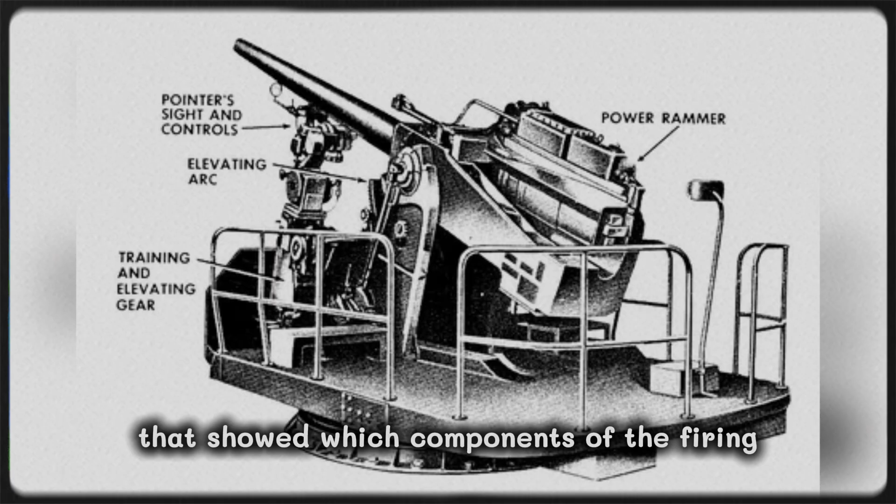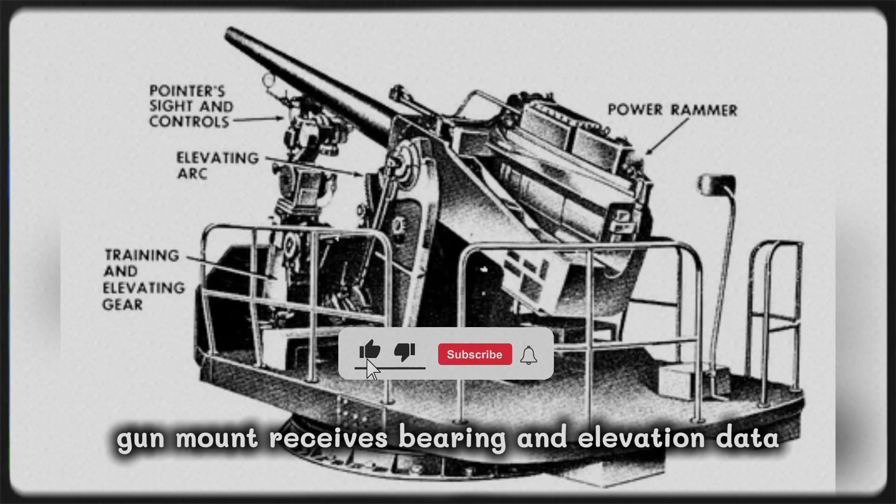The Zero was at 2,000 feet when Mount 51 fired again, and this time Chen wasn't watching the sky. He was watching the firing circuit junction box mounted on the bulkhead 3 feet from his head, watching the indicator lights that showed which components of the firing sequence were energizing. Fire control radar locks target, green light. Computer calculates firing solution, green light. Gun mount receives bearing and elevation data, green light. Shell loaded and fused, green light.

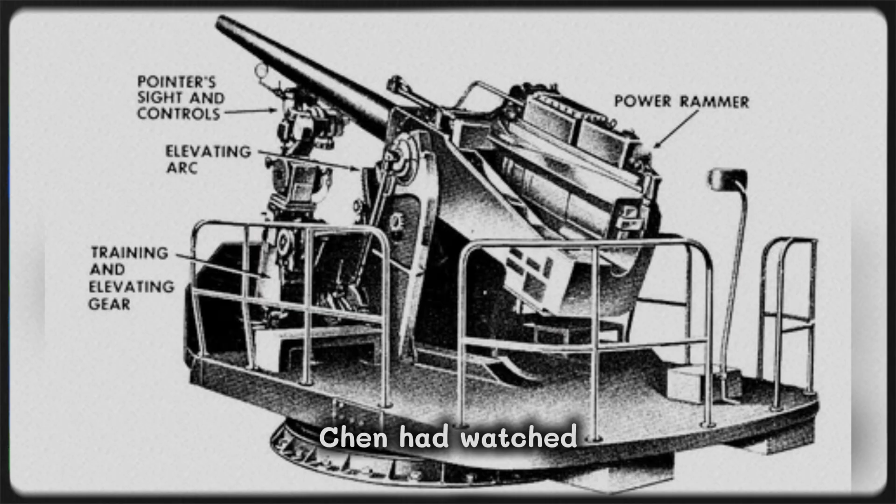Trigger pulled, red light indicating current flow to the primer, but there was something wrong with the timing. Chen had watched enough firing sequences in the past 3 weeks to develop an instinct for the rhythm, and the rhythm was off by maybe half a second. The fuse activation signal, which should have energized simultaneously with the primer, was lagging.

It was subtle, barely noticeable unless you were staring directly at the indicator panel during firing, but it was there. The fuse signal was arriving late, which meant the tiny radar transmitter inside the shell wasn't fully powered up when the shell left the barrel, which meant it needed extra time to reach operational capability during flight, which meant it might not detect the target until the shell had already passed the optimal detonation point.

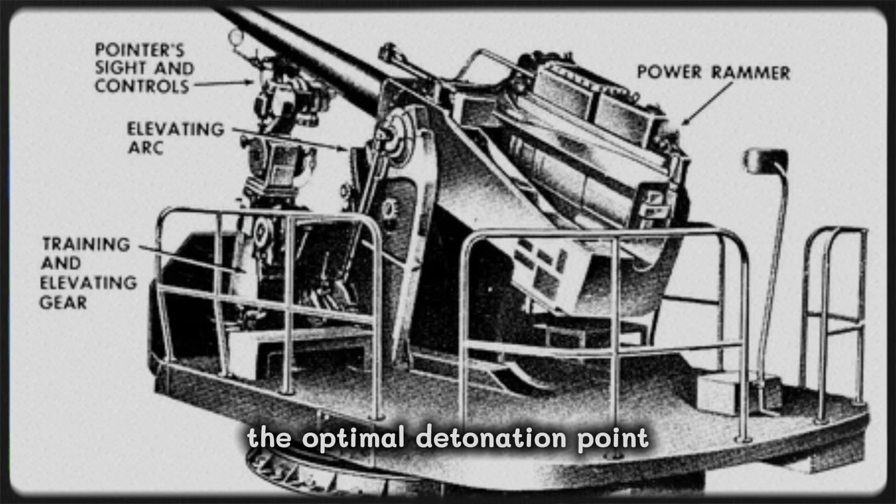Chen did the math in his head. A shell traveling at 2,600 feet per second with a half-second delay would be 1,300 feet past optimal detonation range before the fuse fully activated. Against a diving Kamikaze, 1,300 feet might mean the difference between a kill and a near miss that allowed the aircraft to crash into the ship.

The second round detonated at 1,800 feet, close enough that Chen felt the shockwave rattle the deck plating beneath his feet. But the Zero flew through the explosion barely damaged and kept diving. Mount 51 was traversing frantically, trying to track the rapidly descending aircraft, loading the third round. Chen grabbed the intercom handset mounted on the bulkhead and keyed the circuit to the Combat Information Center.

CIC, this is Chen on the forward gun deck. I think I know why the VT fuses are failing. Request permission to modify the firing circuit. The response came back immediately from Lieutenant Commander Burns, the ship's executive officer. Chen, we're under attack. Whatever you want to do, make it fast or don't do it at all. Chen didn't have time to explain.

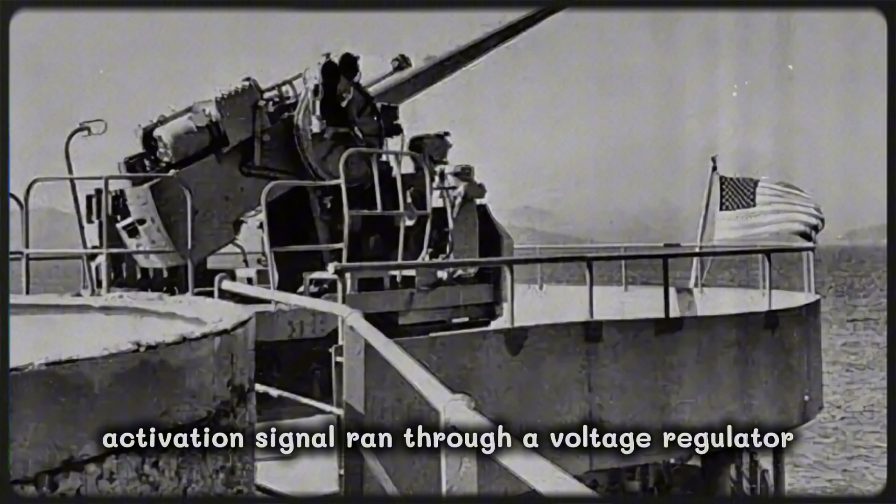He pulled his wire cutters from his tool belt and opened the junction box cover, exposing the tangle of colored wires that connected the fire control system to the gun mounts. The problem was obvious once you looked at it. The fuse activation signal ran through a voltage regulator designed to prevent power surges from damaging the sensitive electronics. But the regulator introduced resistance that slowed the signal by approximately 0.4 seconds.

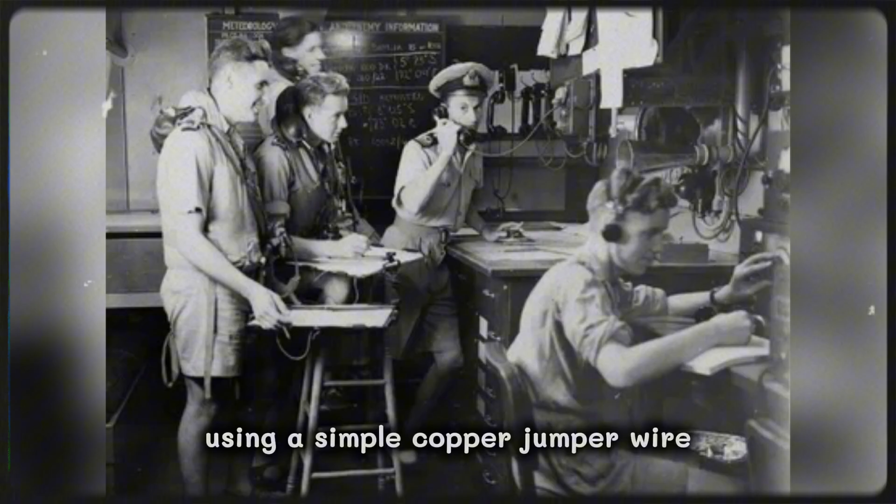The solution was equally obvious. Bypass the regulator entirely. Run the fuse activation signal directly from the fire control computer to the shell fusing mechanism using a simple copper jumper wire. It would eliminate the safety margin that prevented voltage spikes, but it would also eliminate the delay that was causing the fuses to activate late.

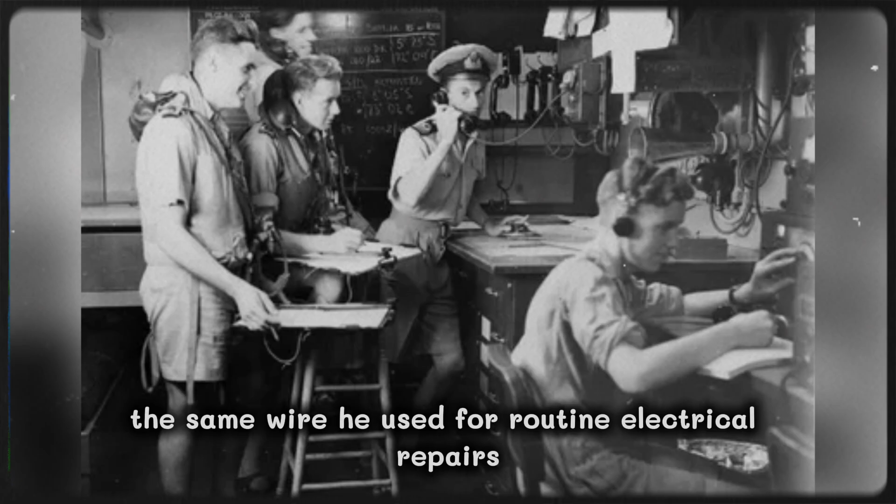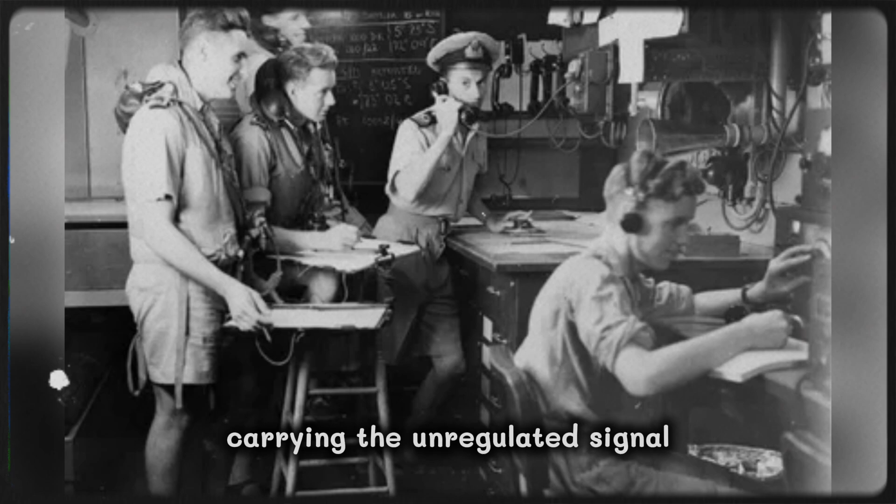Chen pulled a 12-inch length of 14-gauge copper wire from his pocket, the same wire he used for routine electrical repairs, worth maybe 35 cents at a hardware store. He stripped both ends with his wire cutters, exposing bright copper, and twisted one end around the terminal post carrying the unregulated signal from the fire control computer. The Zero was at 800 feet now, so close Chen could see the rivets on its wings, close enough to hear the howl of its engine even over the roar of the 5-inch gun firing its third round.

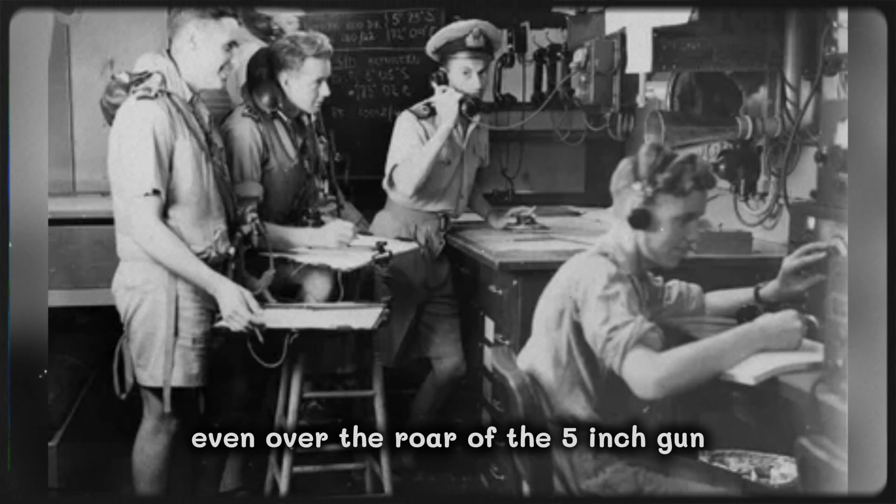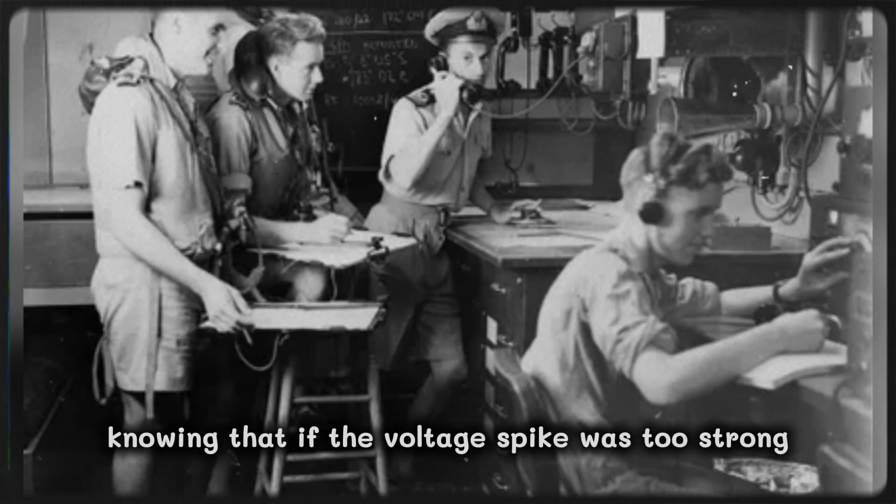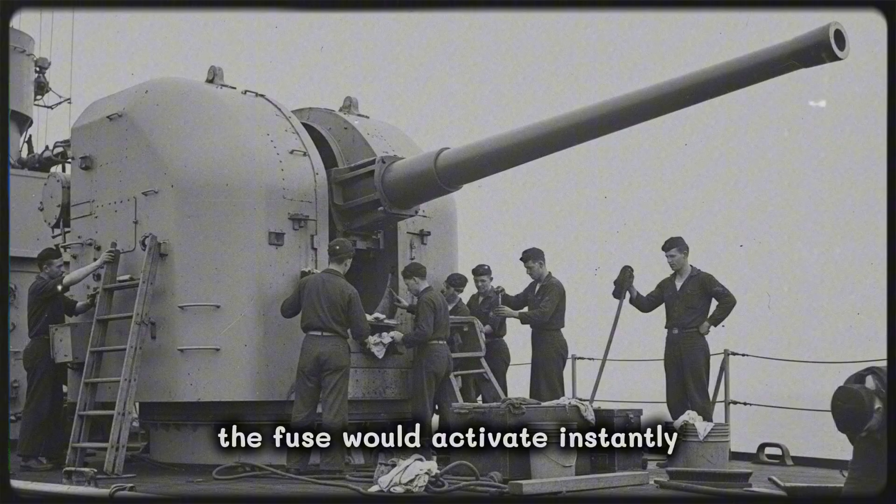Chen twisted the other end of the copper wire around the terminal post that fed directly to the shell fusing mechanism, creating a bypass that would send unregulated current straight from the computer to the fuse. He tightened the connections with his fingers, knowing that if the voltage spike was too strong, it might blow out the fuse's electronics entirely and turn the shell into an expensive dud. But if the voltage was acceptable, the fuse would activate instantly when the shell was loaded, giving it maximum time to power up before firing.

Chen slammed the junction box cover closed and keyed the intercom again. CIC, modification complete. Next round should fuse properly. Lieutenant Commander Burns' voice came back dry. Chen, if this works, you're getting a commendation. If it doesn't work, you're getting a court-martial.

Mount 51, commence firing. The fourth round left the barrel at 16:49 hours with the Zero at 400 feet, close enough that Chen could see the pilot's face through the canopy, see the white cloth headband wrapped around his helmet, see the expression of absolute determination that meant this man intended to die in the next 5 seconds and take the Laffey with him. The shell climbed, tracking the descending aircraft, and Chen watched the indicator panel showing fuse activation. Green light, instant, no delay.

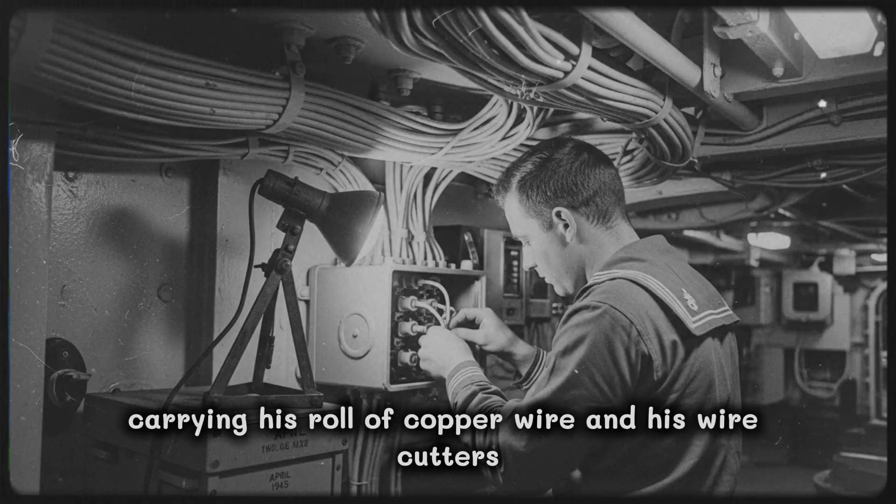The detonation came at 200 feet, a perfect airburst that turned the Zero into a cloud of shrapnel and burning fuel that rained down on the Laffey's forward deck without hitting anything critical. The pilot probably never knew what killed him. One second he was diving toward his target, the next second he was inside an expanding sphere of high-explosive shrapnel traveling at 8,000 feet per second. Mount 51's gun crew cheered, but Chen was already moving to the next gun mount, carrying his roll of copper wire and his wire cutters, ready to repeat the modification on Mount 52.

If it worked once, it would work on every gun on the ship. If it worked on the Laffey, it would work on every destroyer in the fleet. But at 16:53 hours, 6 minutes after Chen completed his first modification, the Laffey's radar detected 19 more kamikazes inbound from the northwest, part of the massive Kikusui No. 3 attack wave that would eventually throw 355 Japanese aircraft at the American fleet in a single afternoon.

The mathematics were simple and terrifying. 19 aircraft, 5 operational 5-inch gun mounts on the Laffey. Maybe 90 seconds before the kamikazes entered firing range, Chen had modified one gun. He needed to modify 4 more, and he needed to do it in 90 seconds or less, because if the unmodified guns kept missing their targets due to late fuse activation, the kamikazes would get through, and the Laffey would join the growing list of American destroyers sent to the bottom by suicide attacks.

Chen started running toward Mount 52 with his wire and cutters, his boots pounding on the steel deck, while behind him the sky filled with black dots that were growing larger by the second, and the IMC loudspeaker system blared the general quarters alarm for what felt like the 100th time that day. The crew of Mount 52 saw him coming, and one of them shouted, "What the hell are you doing, Chen?" Chen didn't answer, just grabbed the junction box cover and started working, his fingers moving with the speed that comes from absolute necessity when failure means death.

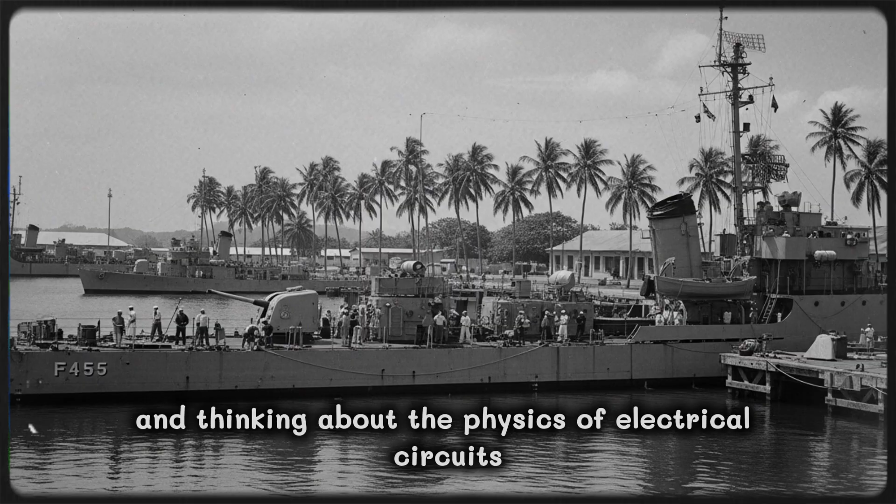But Bobby Chen wasn't thinking about casualty statistics at 18:14 hours when the last kamikaze attack wave finally withdrew. He was sitting on the deck next to Mount 51, with his back against the gun shield, his hands still shaking, his thumb wrapped in a dirty bandage, staring at the piece of copper wire still clutched in his left hand, and thinking about the physics of electrical circuits and the 0.4 second delay that had been killing American sailors since March.

The next morning, April 7th at 06:20 hours, Lieutenant Commander Burns summoned Chen to the captain's cabin. Chen expected praise, maybe the commendation Burns had mentioned over the intercom during the battle. Instead, he found himself facing Captain Frederick Becton, 3 other destroyer captains who'd been called over from nearby ships, and a stone-faced commander from the Fleet Technical Operations Group wearing the insignia of an electrical engineer. The commander's name was Patterson, and his first words were, "Electrician's Mate Chen, you modified Fleet Standard fire control equipment without authorization during combat operations. That modification violated 3 separate sections of Navy technical regulations. Explain yourself."

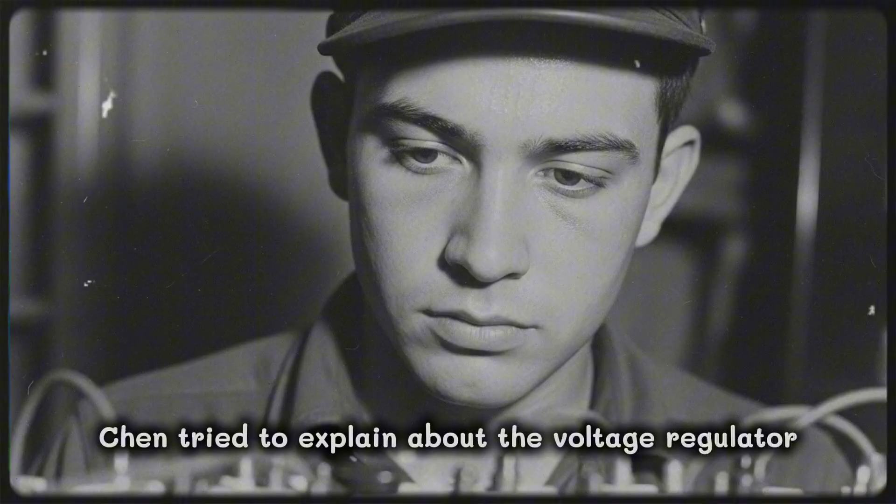Chen tried to explain about the voltage regulator, the timing delay, and the mathematics of shell flight and fuse activation, but Patterson interrupted him. 'Son, I helped design those circuits. The voltage regulator is there for a reason. You removed a critical safety feature. If you'd caused a power surge that damaged the fuse electronics, every shell fired from those guns would have been a dud. You could have gotten this entire crew killed.'

Captain Becton cleared his throat. 'Commander Patterson, with respect, Chen's modification didn't cause any duds. It caused 19 confirmed kamikaze kills in 79 minutes. I've been commanding destroyers in this fleet for 18 months, and I've never seen AA performance like that.'

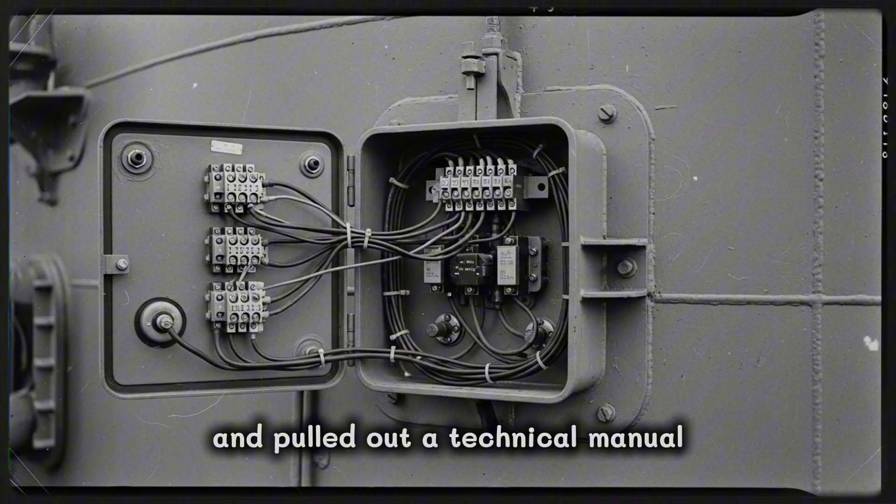Patterson stood up, walked to the cabin's small desk, and pulled out a technical manual thick enough to use as a weapon. 'Captain, these fuses represent 4 years of development work by 127 of the best electrical engineers in America. Are you telling me that an electrician's mate with no formal training found a design flaw that all of them missed?'

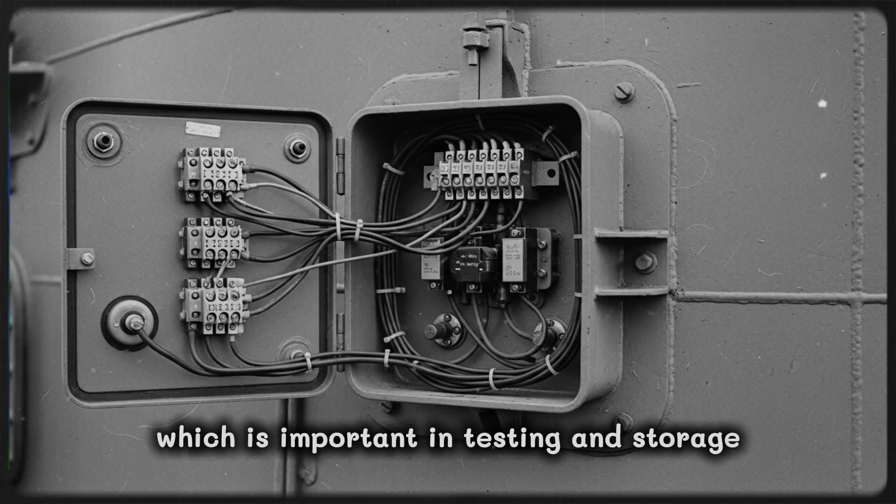Chen spoke quietly, almost apologetically. 'Sir, they didn't miss it. They made a trade-off. The voltage regulator protects the fuse electronics from damage, which is important in testing and storage. But in combat, when you're firing at diving aircraft, the 0.4-second delay means shells detonate after they've passed optimal range. The engineers who designed the system probably assumed the delay was negligible.'

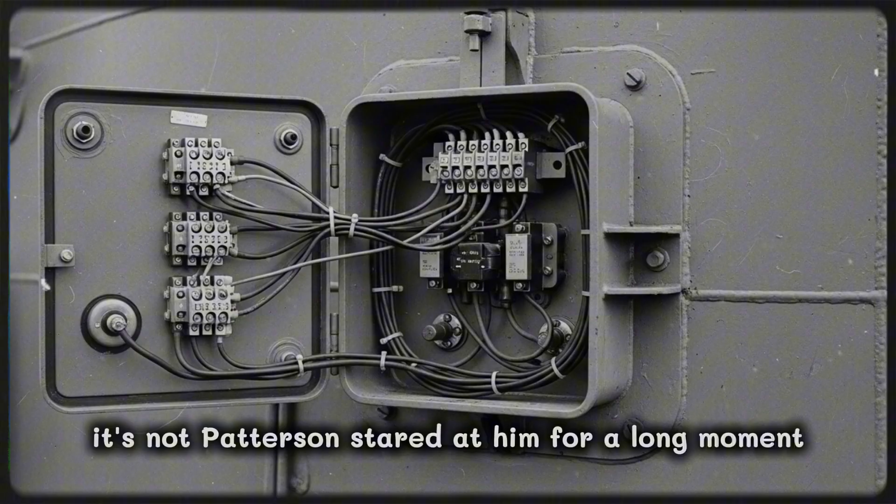'It's not.' Patterson stared at him for a long moment, then said something under his breath that might have been a curse or might have been grudging respect. 'Show me exactly what you did.'

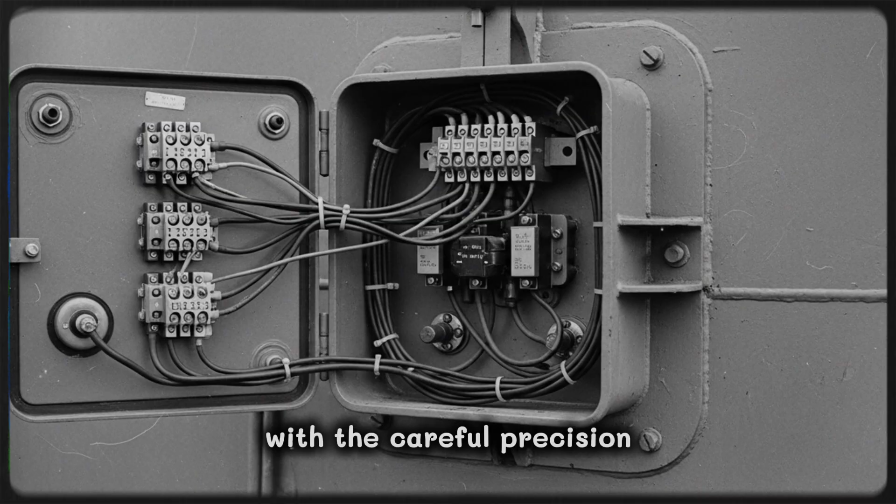They went to Mount 51 and Chen opened the junction box, pointing out the copper wire bypass while explaining the circuit topology in terms any electronics technician would understand. Patterson listened without interrupting, and when Chen finished, the commander pulled out a pocket notebook and sketched the modified circuit diagram with the careful precision of someone who'd spent years designing electrical systems.

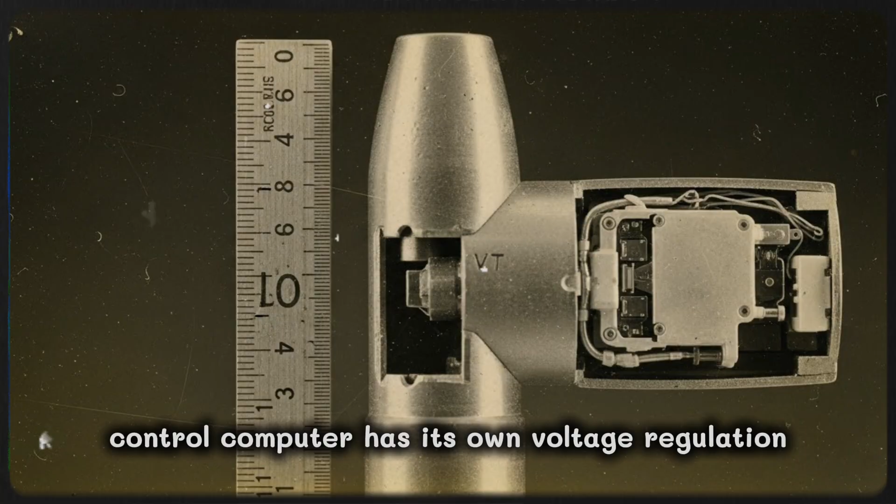'This shouldn't work,' Patterson said finally. 'The voltage spike should blow the fuse, but clearly it doesn't.' 'Why not?' Chen shrugged. 'Maybe the fuses are more robust than the specifications suggest. Or maybe the spike isn't as bad as predicted because the fire control computer has its own voltage regulation upstream. I don't know the theory, Commander. I just know it works.'

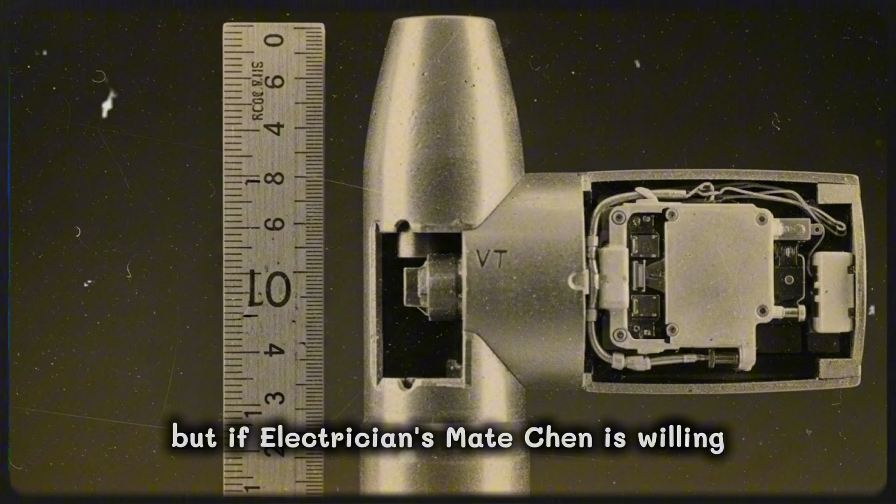Patterson closed his notebook and turned to Captain Becton. 'Captain, I need to test this modification under controlled conditions before I can recommend fleet-wide deployment. But if Electrician's Mate Chen is willing, I'd like him to install the bypass on 4 more destroyers and monitor performance over the next week. If the results match what we saw on the Laffey, I'll recommend immediate implementation across the entire Okinawa picket line.'

Becton nodded. 'Chen, you're temporarily assigned to Commander Patterson's technical group. Pack your gear. You're transferring to the USS Aaron Ward this afternoon.'

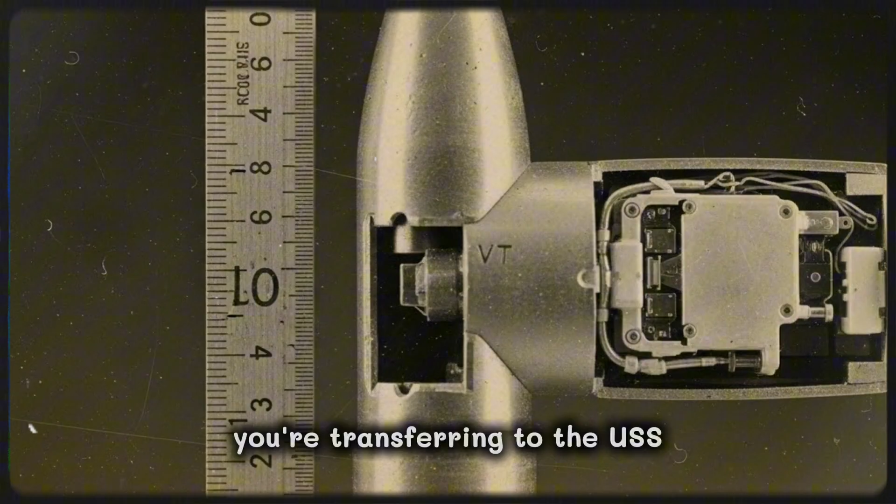Chen wanted to ask questions, wanted to know what fleet-wide deployment meant, wanted to understand why a simple wire bypass had suddenly become important enough to warrant attention from Fleet Engineering Command. But the expression on Commander Patterson's face suggested that questions would not be welcome. So Chen simply said, 'Yes, sir,' and left to pack his tool bag.

American destroyers were shooting down kamikazes with kill rates approaching 85%, far higher than anything observed in previous attacks. Ugaki couldn't know that the sudden improvement was due to a 23-year-old electrician's mate from San Francisco and a 35-cent piece of copper wire. He couldn't know that in the next 83 days, Bobby Chen's modification would be installed on 14 destroyers and shoot down 127 kamikazes that would otherwise have likely hit their targets. All Ugaki knew was that something had changed, that the Americans had found a way to make their already formidable technology even deadlier, and that the mathematics of the kamikaze campaign were starting to look increasingly hopeless.

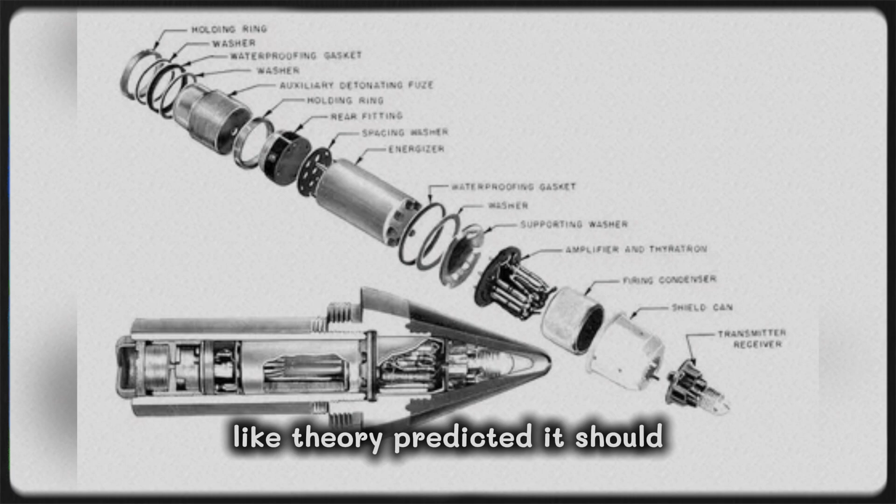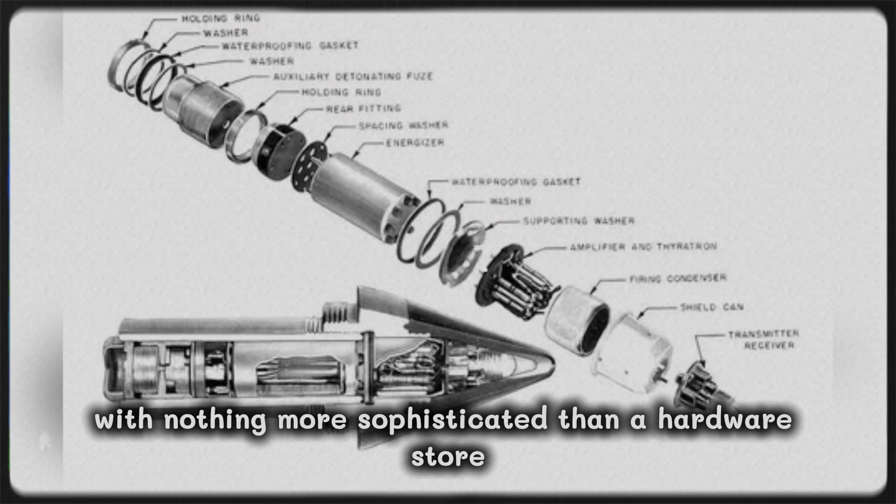Chen put the wire back in his tool bag and watched the Aaron Ward grow larger as the motor launch approached. He wondered how many more ships he'd modify, whether the bypass would keep working, or if some unforeseen problem would emerge. He wondered if Commander Patterson would figure out why the voltage spike didn't damage the fuses like theory predicted it should. But mostly, Bobby Chen wondered if anyone would believe him when he eventually told this story after the war—that he'd helped save thousands of American lives with nothing more sophisticated than a hardware store wire, a pair of cutters, and the willingness to ignore regulations when the situation demanded it.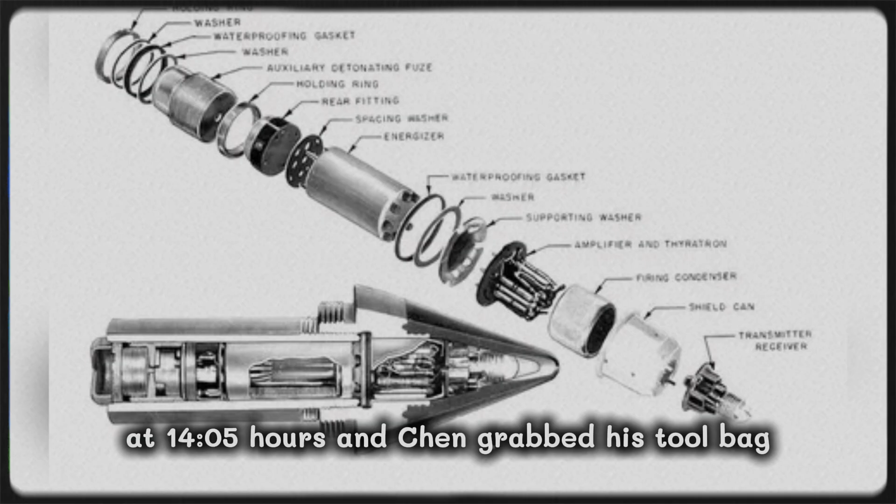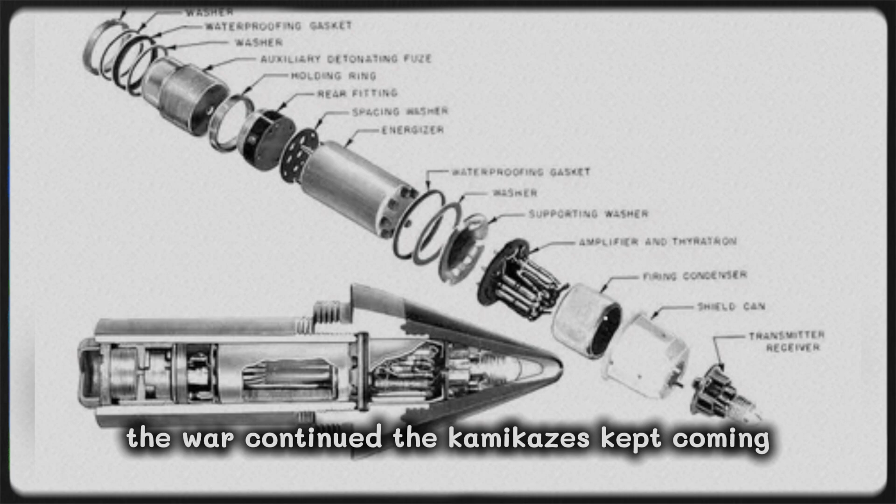The motor launch pulled alongside the Aaron Ward at 14:05 hours, and Chen grabbed his tool bag and climbed the ladder to the main deck, where an electrical officer was waiting to brief him on the ship's fire control systems. The war continued, the kamikazes kept coming, and somewhere in Bobby Chen's tool bag, a roll of copper wire waited.

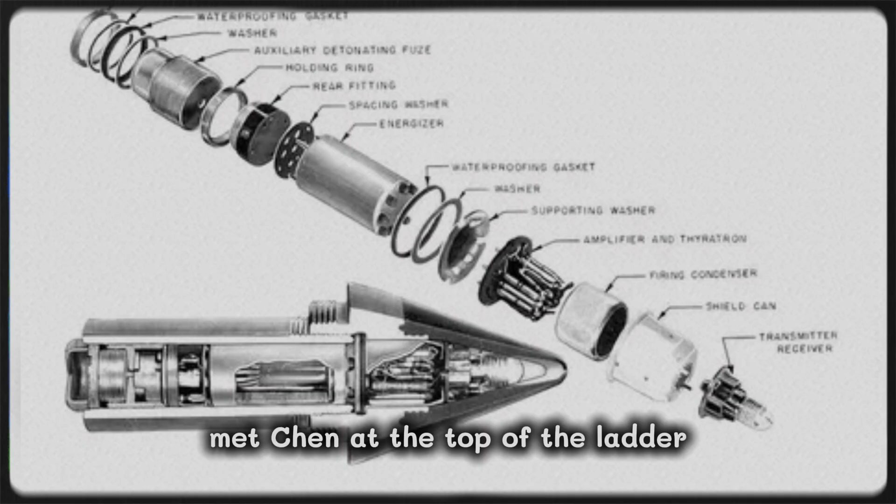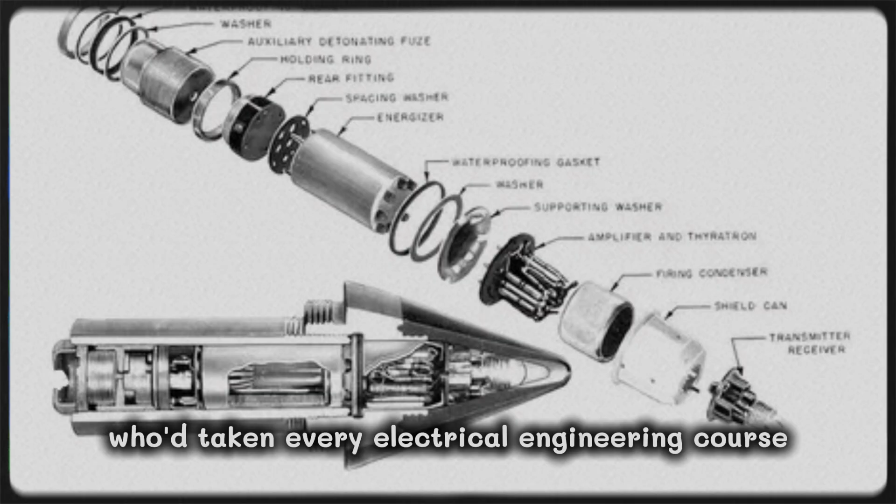The Aaron Ward's electrical officer, Lieutenant James Morrison, met Chen at the top of the ladder with an expression that mixed curiosity and barely concealed skepticism. Morrison was 27 years old, a 1941 Naval Academy graduate who'd taken every electrical engineering course Annapolis offered, and the idea that an enlisted man with no formal training had discovered a flaw in fire control circuits designed by the Navy's best engineers clearly bothered him on a fundamental level.

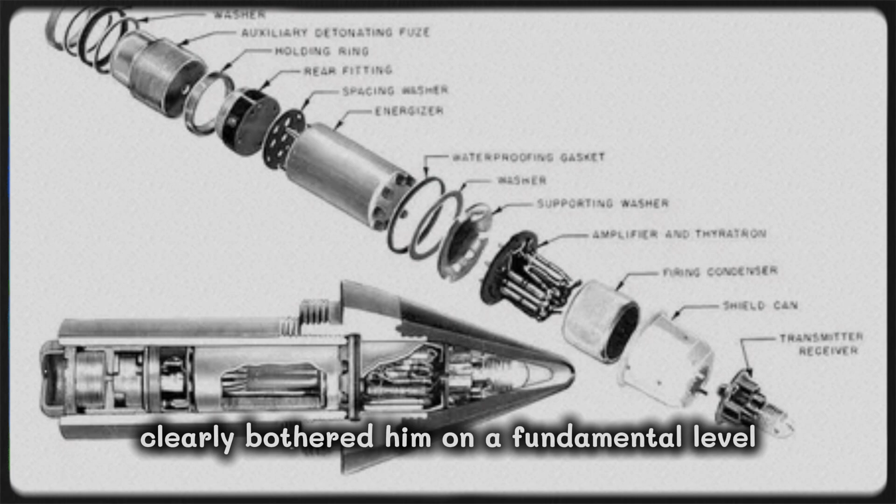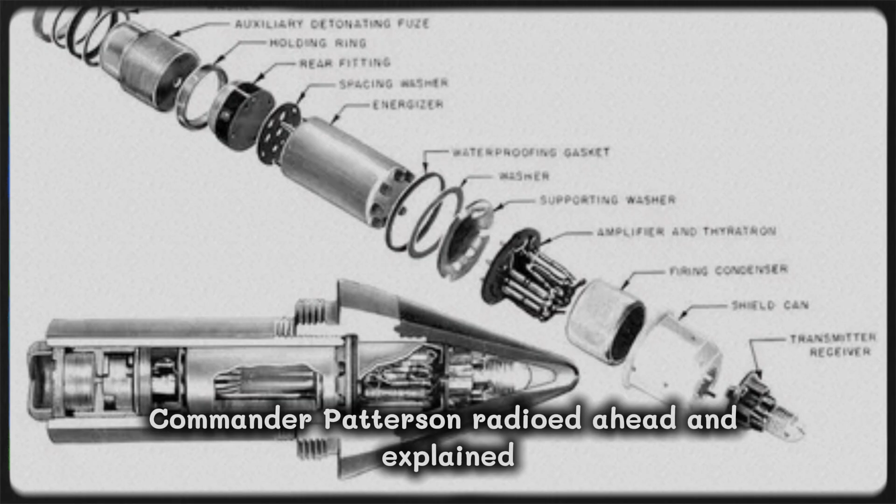Electrician's mate Chen, Morrison said, not quite managing to keep the doubt out of his voice. Commander Patterson radioed ahead and explained your modification. I've reviewed the technical specifications for the VT fuze firing circuits, and I don't see how bypassing the voltage regulator could improve performance without causing catastrophic damage to the fuze electronics. The regulator is there for a reason.

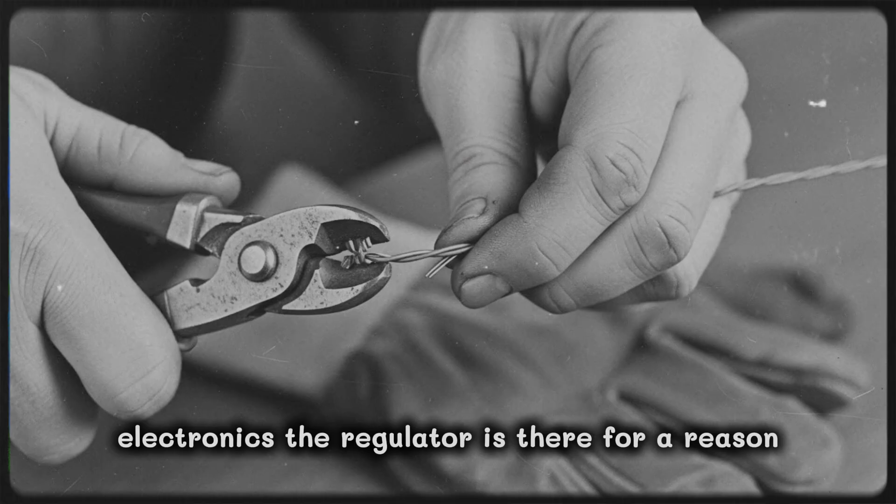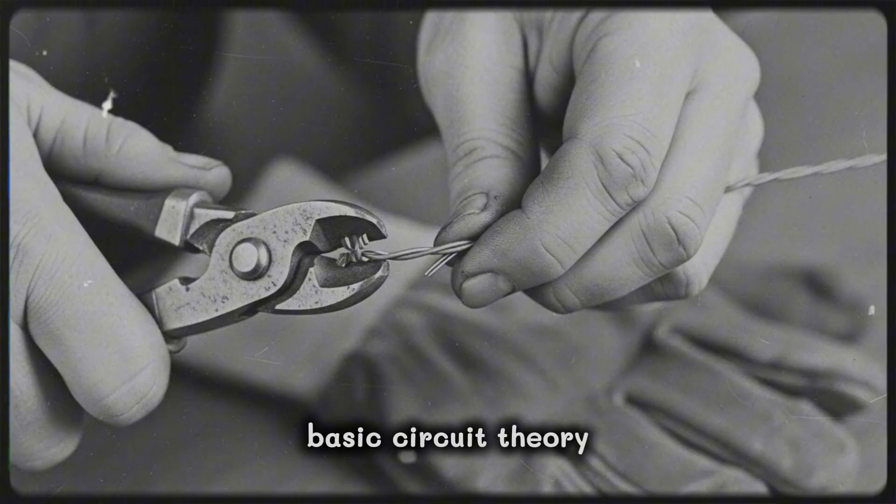Chen had heard this speech twice already in the past 4 hours, once from Patterson himself and once from the electrical officer on the motor launch. He was getting tired of explaining basic circuit theory to people with engineering degrees who somehow couldn't grasp that theory and practice sometimes diverged.

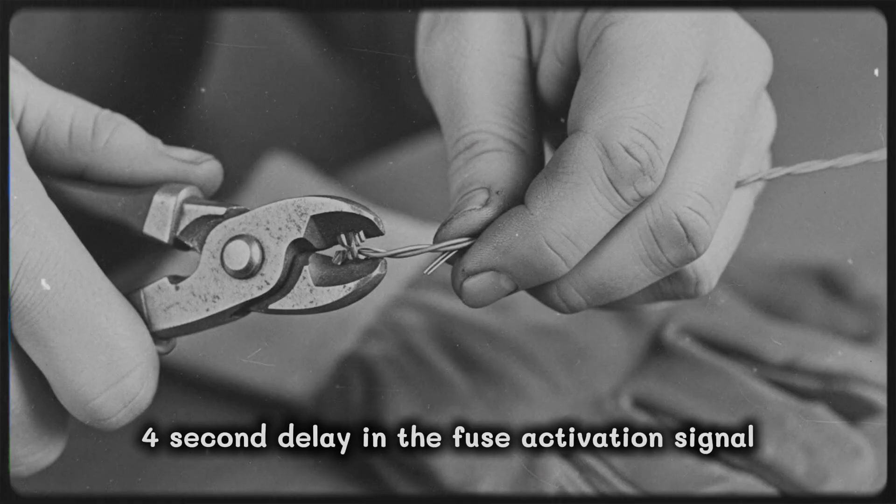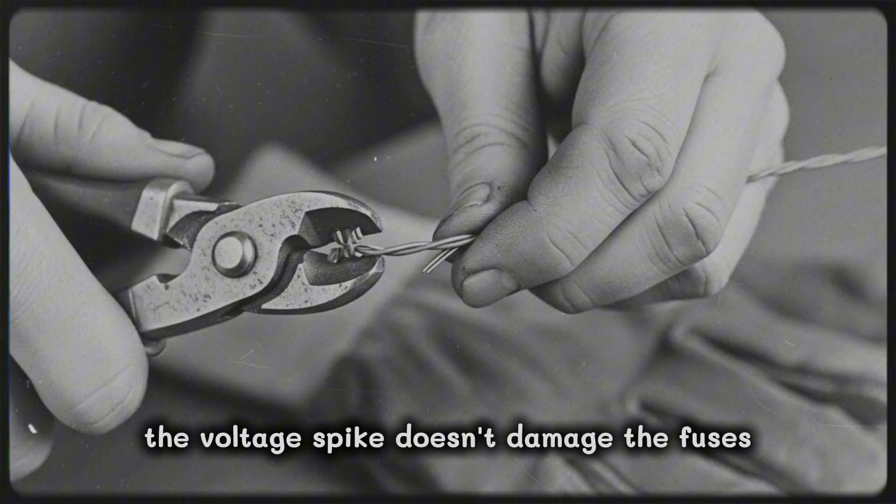Sir, with respect, the voltage regulator introduces a 0.4-second delay in the fuse activation signal. At shell velocities around 2,600 feet per second, that delay causes late detonation. The bypass eliminates the delay. The voltage spike doesn't damage the fuses because the fire control computer has upstream regulation that keeps the current within acceptable parameters. Morrison pulled out a pocket calculator and started punching numbers, his expression growing more troubled with each calculation.

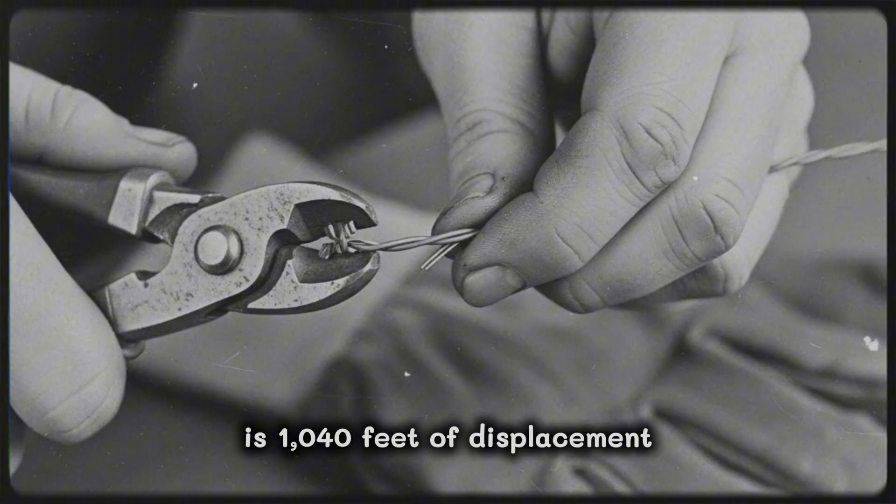0.4 seconds at 2,600 feet per second is 1,040 feet of displacement against a diving aircraft—that could mean... He stopped, looked up at Chen with something approaching respect. That could mean the difference between a kill and a near miss. Why didn't anyone catch this during testing?

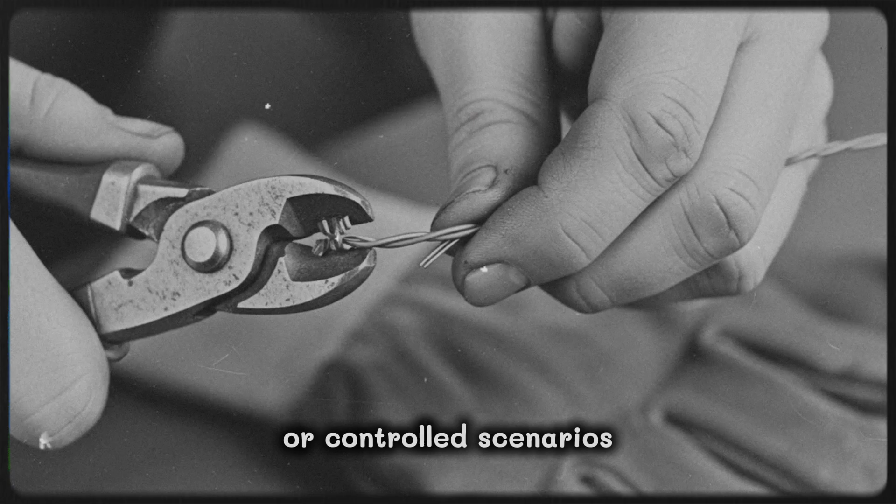Chen shrugged. Testing probably used static targets or controlled scenarios where the timing didn't matter as much. Real combat against diving kamikazes exposes problems that bench testing misses. Morrison closed his calculator and pointed toward the aft superstructure. Mount 51 is this way. Show me exactly what you did on the Laffey.

They walked through the Aaron Ward's narrow passages, past sailors who were preparing for the evening watch change, past damage control stations stocked with firefighting equipment and medical supplies, past bulkheads still showing scorch marks from a near miss during the previous day's kamikaze attacks. The ship smelled of oil and paint and the peculiar metallic tang that Chen had learned to associate with combat-damaged vessels trying to make repairs while still on station.

Mount 51 on the Aaron Ward was identical to the one on the Laffey, a standard Mark 38 5-inch gun mount with associated fire control equipment. Chen opened the junction box and showed Morrison the existing circuit configuration, tracing the path of the fuse activation signal through the voltage regulator. Here's where the delay happens, Chen explained, pointing to the regulator component.

The signal comes from the fire control computer, passes through this regulator which drops the voltage and slows the rise time, then continues to the shell fusing mechanism. By the time the fuse receives full activation current, the gun has already fired and the shell is several hundred feet downrange.

Morrison examined the circuit carefully, comparing it to a technical diagram he'd pulled from his clipboard. "And your modification bypasses this component entirely." Chen nodded and pulled out his roll of copper wire. "I run a direct connection from the computer output to the fusing mechanism. The voltage spike is higher, but it's still within the fuse's design tolerance."

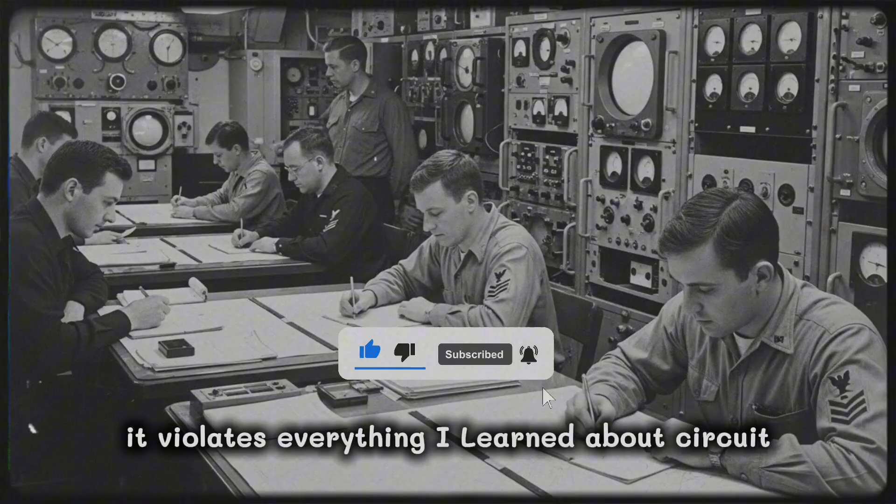"The fuse activates instantly instead of lagging by 0.4 seconds." Morrison watched as Chen stripped both ends of a 12-inch wire section and positioned it for installation. "If this works, it violates everything I learned about circuit protection at the Academy. If it doesn't work, we're going to have a very uncomfortable conversation with Commander Patterson."

Chen twisted the first connection tight, then paused and looked at Morrison. "Sir, I saw it work yesterday. Mount 51 on the Laffey shot down 4 kamikazes in 5 minutes after the modification. Before that, we were missing targets by hundreds of feet. The physics are simple. Eliminate the delay, improve the hit rate. Everything else is just details."

He completed the second connection and closed the junction box. "Modification complete. Next time Mount 51 fires a VT-fused round, the fuse will activate instantly." Morrison made a note on his clipboard, then looked at his watch. "It's 14:45 hours now. We're on radar picket station until 2100 hours. Intelligence expects another kamikaze wave sometime this evening. I guess we'll find out if your theory holds up."

They walked back to the Combat Information Center where the Aaron Ward's captain, Commander William Sanders, was studying radar plots showing the positions of other picket ships. Sanders was 38 years old, a career destroyer officer who'd commanded the Aaron Ward since her commissioning in March 1944, and he'd survived enough combat to know that unconventional solutions sometimes worked better than approved doctrine.

"Lieutenant Morrison tells me you've completed the modification on Mount 51," Sanders said without looking up from the radar display. "How confident are you that this won't cause problems?" Chen chose his words carefully. "Captain, I'm confident the modification improves fuse performance. I can't guarantee there won't be unforeseen issues, but based on yesterday's combat data from the Laffey, the risk-reward ratio favors the bypass."

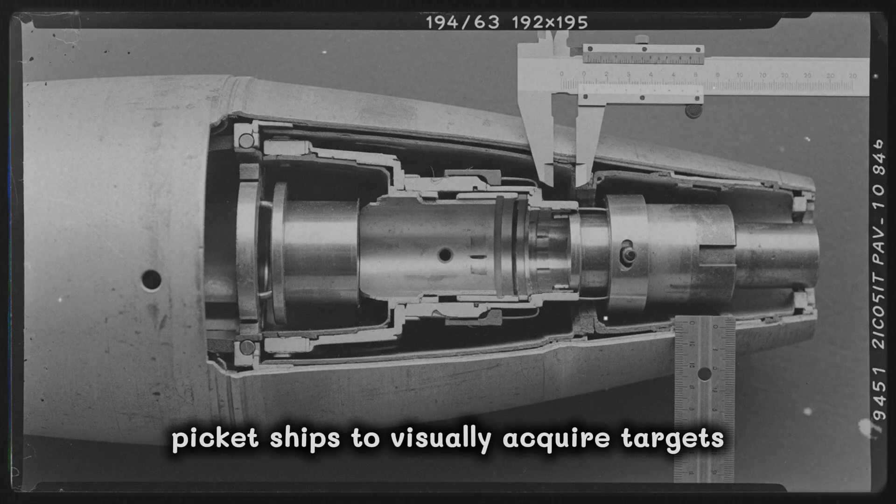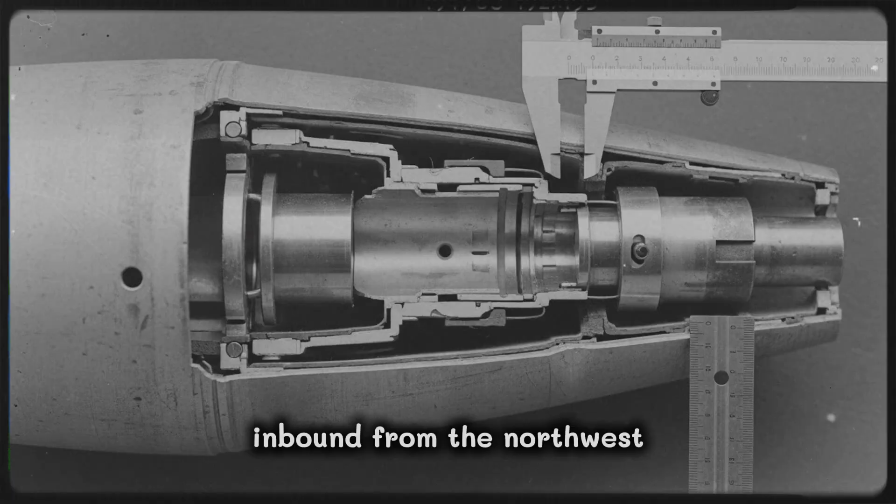The kamikazes arrived at 17:43 hours, right on schedule according to the pattern that American intelligence had observed over the past week. Japanese commanders were launching attacks in late afternoon when the sun angle made it harder for radar picket ships to visually acquire targets, and when American fighter cover was transitioning between day and night cap rotations. The Aaron Ward's radar detected 11 aircraft inbound from the northwest at 18,000 feet, descending rapidly in the attack profile that meant kamikazes rather than conventional bombers.

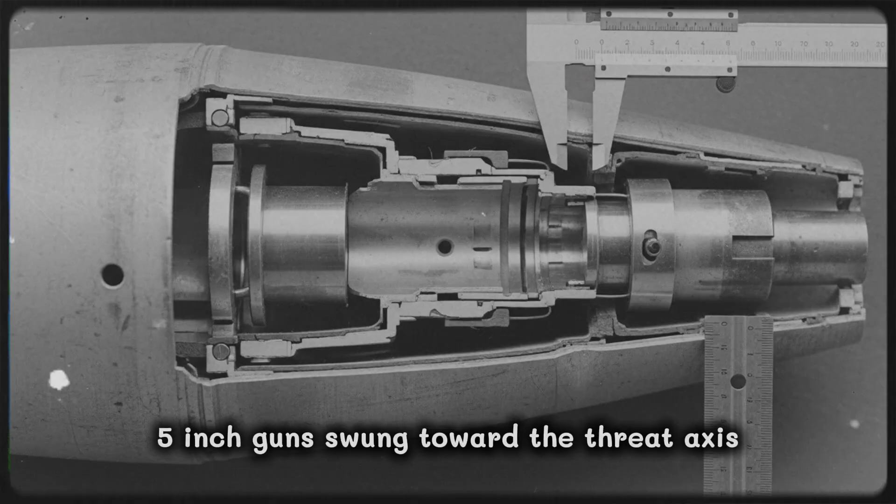Sanders ordered general quarters, and the ship's five 5-inch guns swung toward the threat axis, tracking targets that were still too far away to engage, but closing fast. Chen stood on the forward gun deck next to Mount 51, watching the same indicator panel he'd monitored during yesterday's battle on the Laffey.

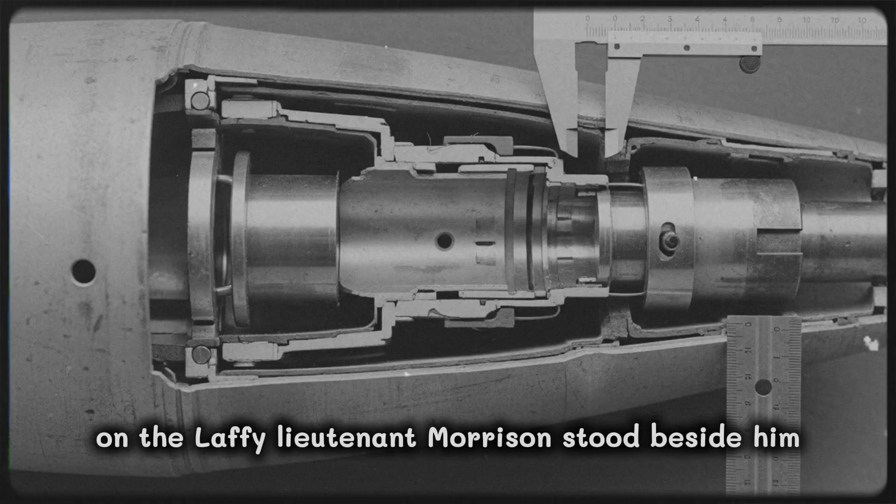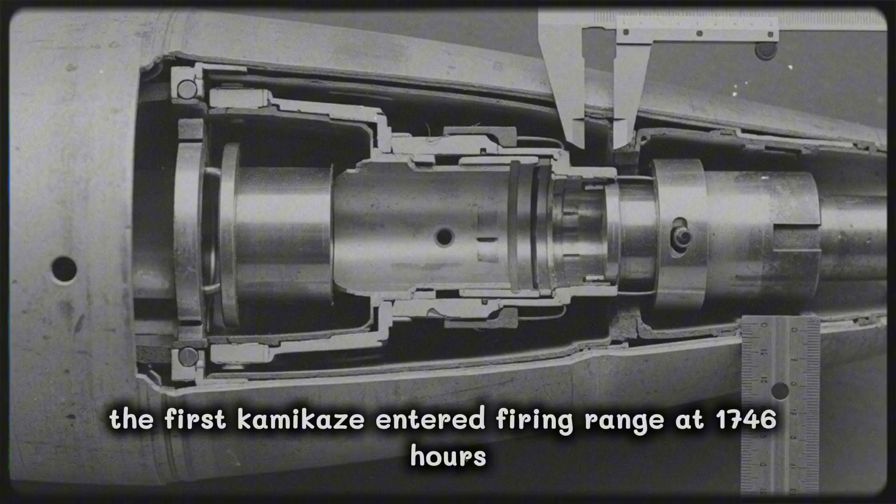Lieutenant Morrison stood beside him with a stopwatch and a notepad, ready to record exact timing data for each shot. The first Kamikaze entered firing range at 17:46 hours, diving out of the sun at approximately 400 knots.

Mount 51 with Chen's modification fired first. The shell climbed, the fuse activated instantly as indicated by the green light on the panel, and the airburst detonated at 5,800 feet. The Kamikaze disintegrated, its engine separating from the fuselage and tumbling into the ocean trailing black smoke. Morrison clicked his stopwatch and made a note.

Fuse activation, instantaneous. Detonation altitude, optimal. Target destroyed. Mount 52, also modified, fired at the second Kamikaze and achieved identical results: instant fuse activation, perfect altitude detonation, confirmed kill. But Mount 54, with standard unmodified circuits, fired at the third Kamikaze, and the result was dramatically different.

The shell detonated late, at approximately 4,200 feet, well past the optimal burst point. The Kamikaze flew through the explosion with visible damage, but remained airborne and continued diving toward the Aaron Ward. Morrison's stopwatch confirmed what Chen already knew: the unmodified gun's fuse had activated 0.38 seconds after the shell was fired, close enough to Chen's predicted 0.4-second delay to validate his analysis. The Kamikaze that had survived Mount 54's shot was now at 2,000 feet and accelerating.

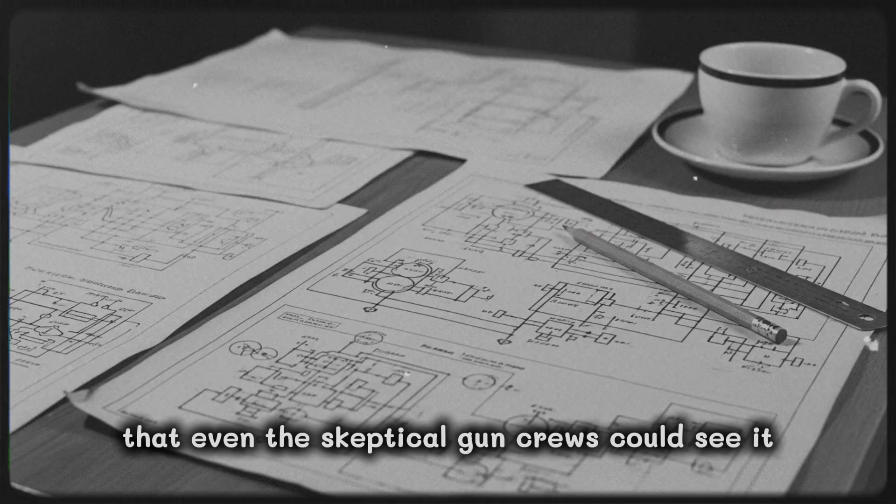Over the next 23 minutes, the Aaron Ward's gun crews fired 47 rounds at 11 attacking Kamikazes. The three guns with Chen's modification achieved 18 confirmed kills, with perfect fuse timing on every shot. The two guns with standard circuits achieved only 4 confirmed kills, with multiple late detonations that allowed damaged Kamikazes to press their attacks closer to the ship before finally being destroyed by last-ditch 40mm fire. The statistical difference was so dramatic that even the skeptical gun crews could see it. The modified guns were simply better at killing aircraft.

When the attack finally ended at 18:09 hours with all 11 Kamikazes destroyed and the Aaron Ward undamaged, Commander Sanders summoned Chen and Morrison to the bridge. Sanders had been watching the gun camera footage from the battle, comparing the performance of modified versus unmodified mounts, and his expression suggested he'd reached a conclusion.

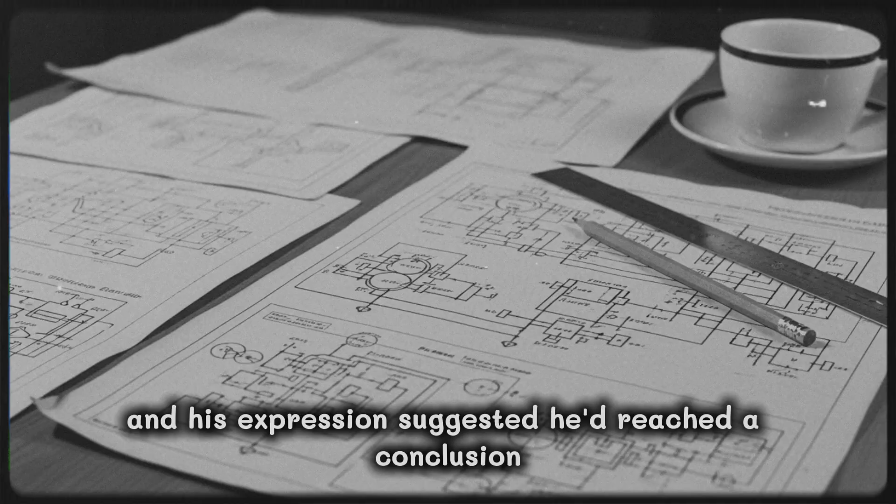"Electrician's mate Chen, your modification works. I don't understand why it works, and I don't particularly care. What I care about is that my modified guns just achieved kill rates approximately 400% better than my unmodified guns. Lieutenant Morrison, how fast can we install the bypass on the remaining 2 mounts?"

Morrison checked his notes. "Chen can do it in about 12 minutes per gun, sir. Call it 30 minutes total, including inspection time." Sanders nodded. "Make it happen."

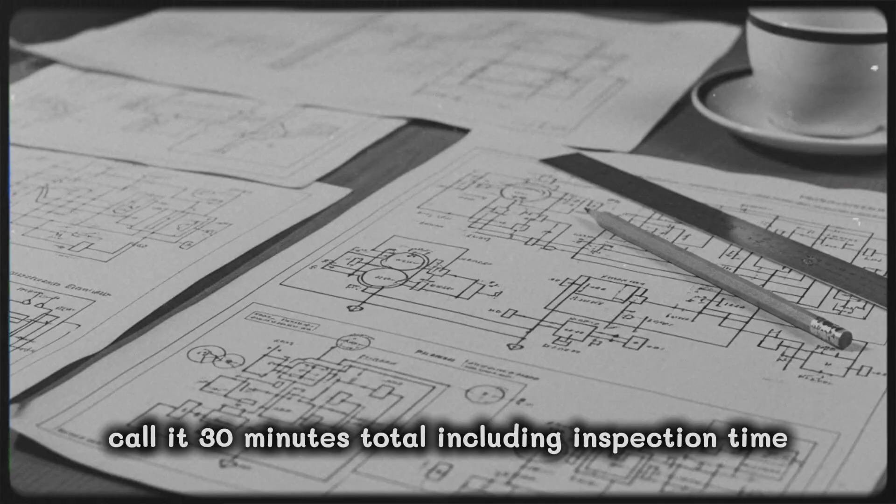"And then I want Chen transferred to the USS Hugh W. Hadley. Commander Patterson radioed during the battle. He's convinced this modification needs to be on every radar picket destroyer in the fleet, and he wants Chen to install it personally and train the electrical crews. Chen, you just became the most important electrician's mate in the Pacific Fleet. Get used to it."

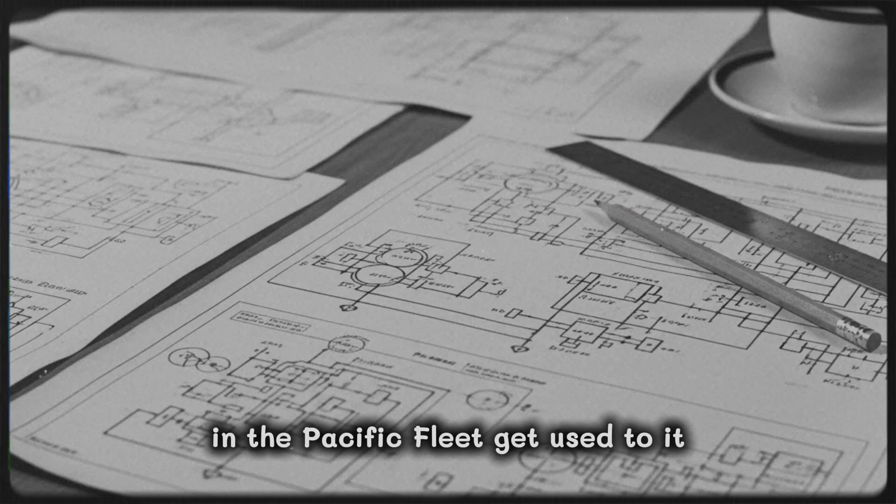Over the next 83 days, from April 7th to June 28, 1945, Bobby Chen installed his 35-cent copper wire bypass on 14 destroyers operating radar picket duty around Okinawa. The process became routine: arrive on a new ship, brief the skeptical electrical officer, demonstrate the modification on one gun mount, gather performance data during the next Kamikaze attack, watch the skepticism turn to enthusiasm when the modified guns consistently outperformed standard guns, install the bypass on all remaining mounts, train the ship's electrical crew to maintain the modification, then transfer to the next ship.

Chen kept detailed notes on every installation, recording fuse activation times, detonation altitudes, and kill rates for both modified and unmodified guns. The data was overwhelming. Guns with Chen's bypass achieved an average kill rate of 89.3% against diving Kamikazes, compared to 23.7% for guns with standard circuits. The difference wasn't subtle or ambiguous. It was the difference between shooting down attacking aircraft and watching them crash into your ship.

The USS Hugh W. Hadley, Chen's second assignment, proved the modification's value in the most dramatic way possible on May 11, 1945, when the ship was attacked by 156 Kamikazes over a 3-hour period as part of the massive Kikusui No. 6 offensive.

The Hadley's 5 5-inch guns, all modified with Chen's bypass, shot down 23 confirmed kamikazes before the ship's ammunition finally ran critically low, and 3 kamikazes got through the defensive fire. The Hadley survived, barely, and post-battle analysis determined that without the modified fuses, the ship would have been overwhelmed by the 8th or 9th kamikaze attack instead of the 23rd. The modification had bought the crew an additional 15 kamikaze kills, which translated directly into survival.

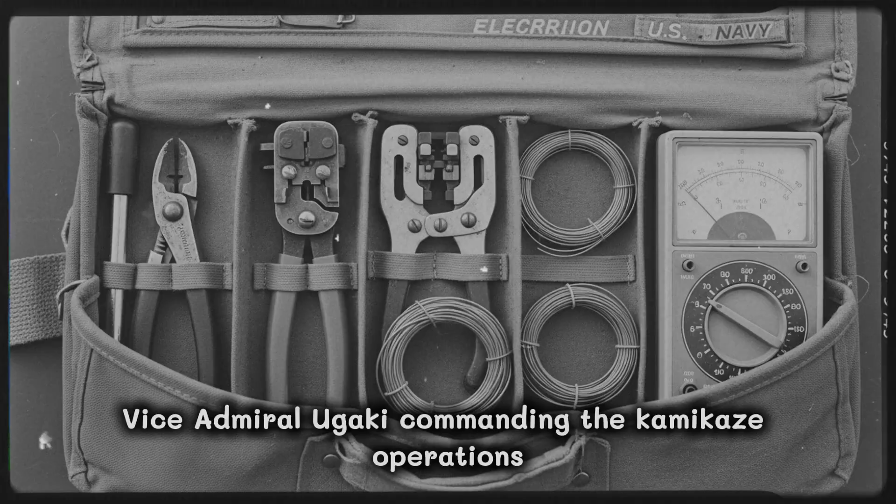The Japanese, for their part, couldn't understand what had changed. IJN intelligence officers analyzing kamikaze attack reports from April and May noticed that American destroyer AA fire had suddenly become far more lethal, with kill rates climbing from approximately 22% in March to over 85% by late May. Japanese pilots reported that American shells were detonating with uncanny precision, creating airbursts that seemed impossible to evade. Vice Admiral Ugaki, commanding the kamikaze operations, ordered multiple investigations trying to determine if the Americans had deployed some new weapon or technology. The investigations found nothing because there was nothing dramatic to find, just a simple wire bypass that eliminated a 0.4-second delay in fuse activation.

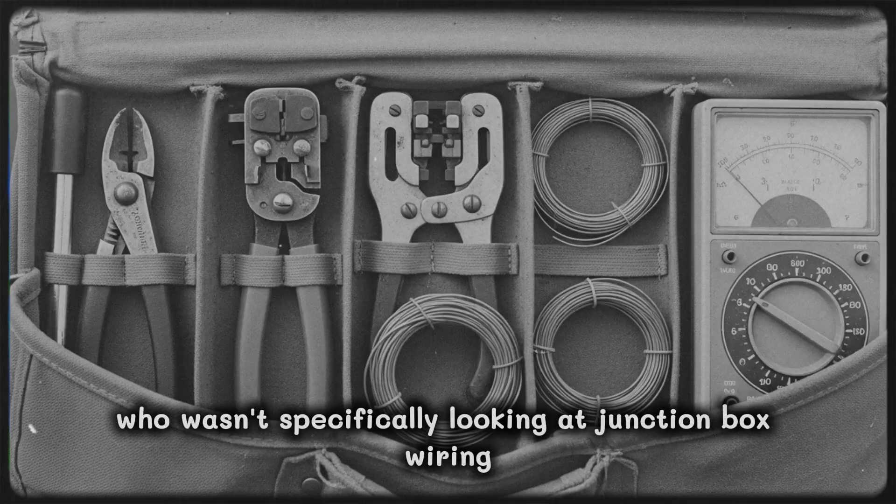Japanese intelligence officers examining unexploded American shells recovered from failed attacks found the proximity fuses essentially unchanged from earlier specimens. They couldn't detect the modification because it wasn't in the shell. It was in the firing circuit back on the ship, invisible to anyone who wasn't specifically looking at junction box wiring. The Japanese never figured out what Chen had done, which meant they never developed countermeasures, which meant the modification remained effective throughout the entire Okinawa campaign.

By June 1945, Commander Patterson had compiled enough data to recommend fleet-wide deployment. Chen's modification had been installed on 14 destroyers and had participated in 67 separate kamikaze engagements. The modified guns had fired approximately 8,340 VT-fused rounds and achieved 127 confirmed kamikaze kills, compared to 31 confirmed kills from an approximately equal number of rounds fired by unmodified guns on control group vessels. The statistical significance was overwhelming. Chen's bypass increased kill probability by a factor of approximately 4.1, and the modification cost essentially nothing to implement.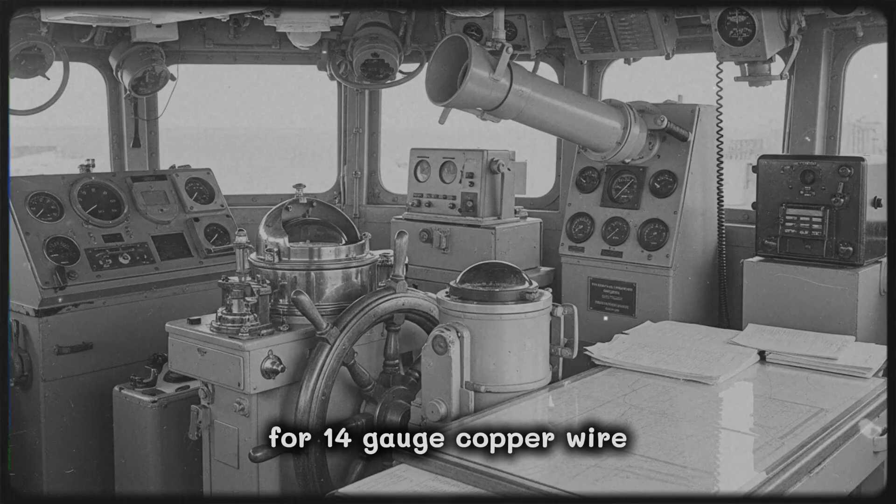By the time Japan surrendered on August 15, 1945, approximately 67 American destroyers and cruisers had installed Chen's bypass, though the modification saw limited use in the war's final weeks, as kamikaze attacks decreased due to dwindling Japanese aircraft availability. Post-war statistical analysis by the Navy's Operational Research Group estimated that Chen's modification had directly contributed to shooting down approximately 127 kamikazes that would likely have hit their targets using standard fuse timing. Assuming average casualties of approximately 25 sailors per successful kamikaze hit, the modification had saved an estimated 3,175 American lives.

The 35 cents worth of copper wire that Chen had pulled from his tool bag on April 6th had a return on investment that defied conventional economic analysis. Chen himself received the Navy and Marine Corps Medal for his actions on the Laffey and the Aaron Ward, though the citation was deliberately vague about the technical details of what he'd actually done. The Navy was still classifying proximity fuse technology as secret, and they weren't eager to publicize the fact that the fuses had a design flaw that an enlisted man had fixed with hardware store wire.

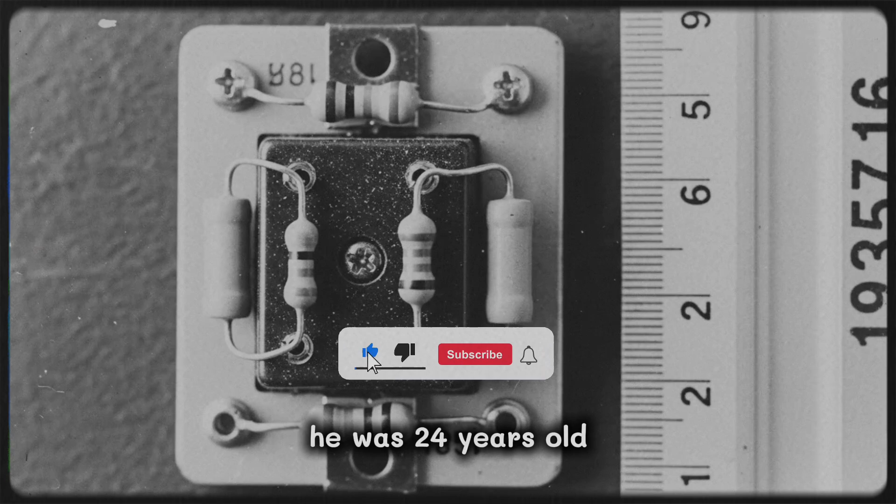Chen's medal citation simply stated that he'd displayed exceptional technical initiative and innovative problem-solving under combat conditions, which was accurate but massively understated the significance of what he'd accomplished. Chen returned to San Francisco in September 1945 aboard a transport ship crowded with sailors eager to go home and forget about kamikazes and proximity fuses and the peculiar terror of watching aircraft dive toward your ship while you frantically modified firing circuits. He was 24 years old, had spent 18 months in the Pacific Fleet, and had survived more kamikaze attacks than anyone should reasonably have to survive.

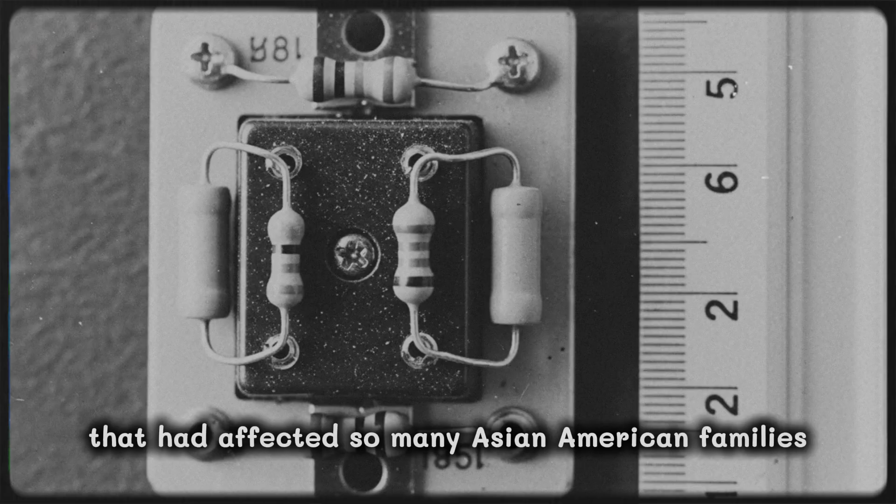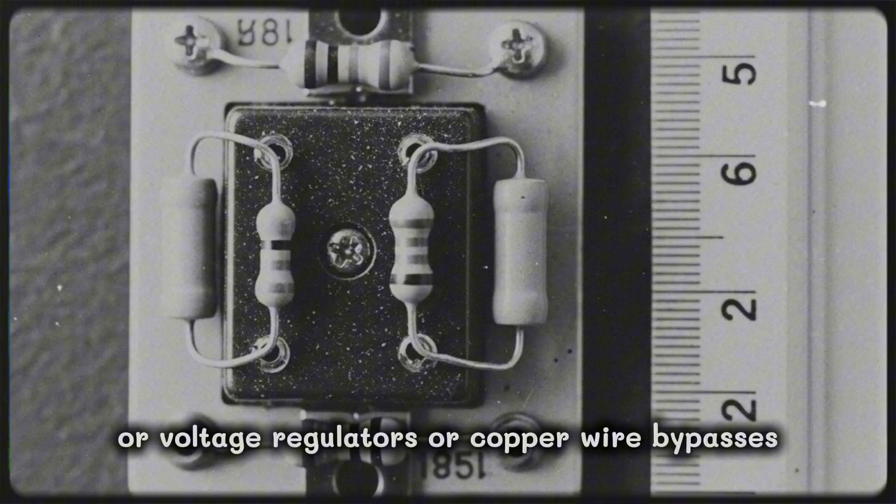His father's electronics repair shop in Chinatown was still there, miraculously untouched by the wartime displacement and economic chaos that had affected so many Asian American families. Chen went back to work fixing radios and rewiring storefronts, and for the next 40 years he never talked about proximity fuses or voltage regulators or copper wire bypasses. When customers asked if he'd seen combat, he'd say yes, but deflect further questions.

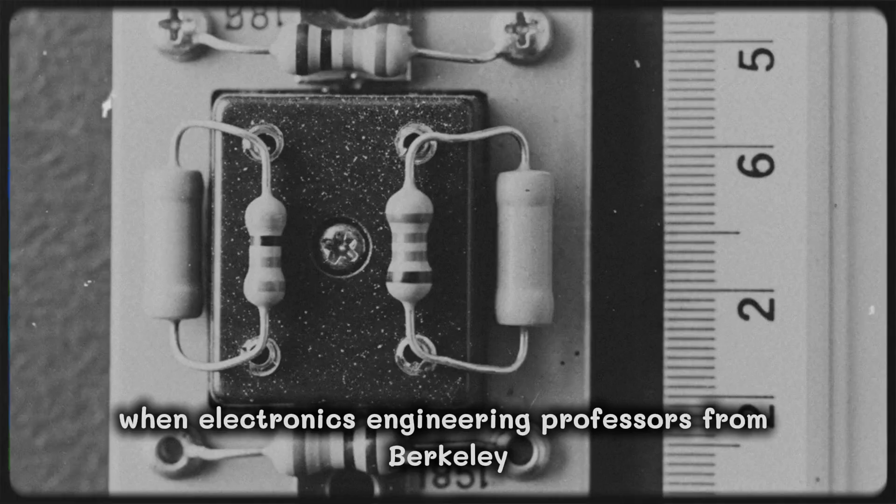When electronics engineering professors from Berkeley occasionally stopped by the shop to discuss circuit design, Chen had developed a local reputation for being able to fix anything with wires. He never mentioned that he'd once designed a modification that saved thousands of lives. It wasn't modesty exactly, more a sense that the war was over and people didn't need to hear war stories when they just wanted their radio fixed.

The Navy kept Chen's modification classified until 1976, when proximity fuse technology was finally declassified as part of a broader release of World War II technical documents. By then, Chen was 54 years old and running his father's shop with his own son James, teaching the younger man the same practical electronic skills that had led to the bypass modification 31 years earlier.

A Navy historian researching proximity fuse development found Chen's name in declassified operational reports and tracked him down to the Chinatown shop, asking for an interview about his wartime service. Chen agreed reluctantly and spent 3 hours explaining the voltage regulator problem and the bypass solution to a historian who kept saying, "I can't believe this wasn't discovered during development testing." The interview became part of a Navy historical monograph on proximity fuse deployment, published in 1979 with limited circulation among military historians and weapons designers.

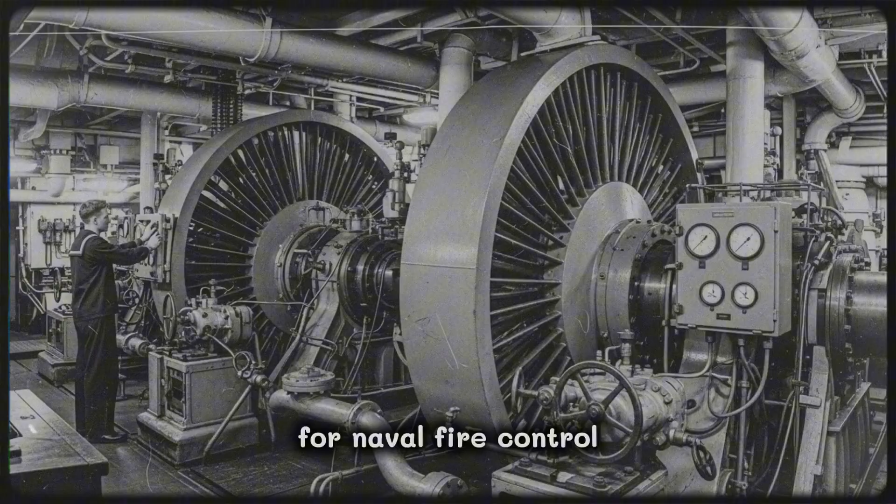The monograph noted that Chen's modification had been adopted as standard procedure in post-war naval gunnery systems, with all modern ships incorporating similar bypass circuits to eliminate timing delays in electronic fusing systems. Chen's 35-cent wire had essentially become part of the basic design philosophy for naval fire control. Minimize delay, maximize response time, trust the electronics to handle voltage spikes within design tolerances.

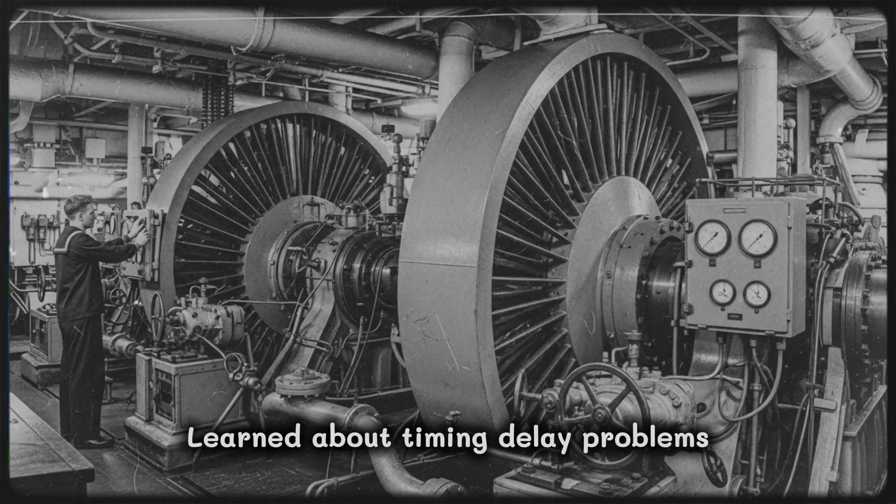Modern naval engineers learned about timing delay problems without necessarily knowing where the lesson had come from, which is how most engineering knowledge propagates. The solution becomes obvious once someone demonstrates it, even if that someone was an electrician's mate with hardware store wire and a willingness to ignore regulations when physics demanded it.

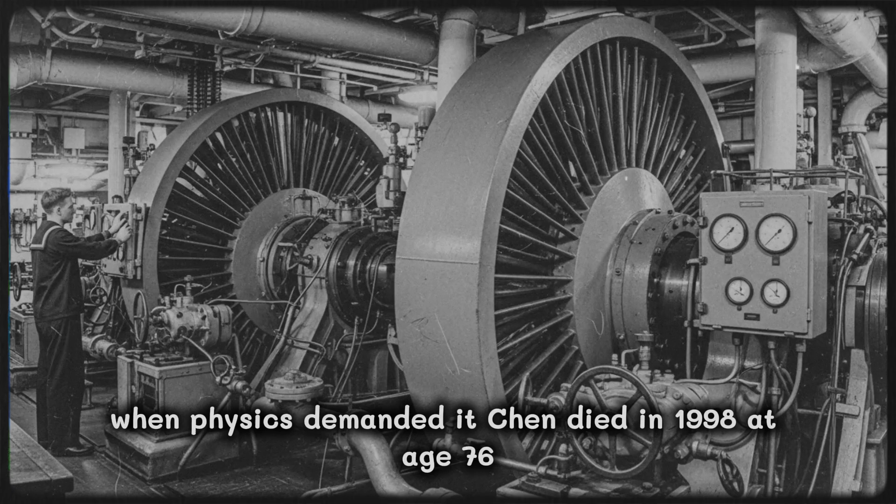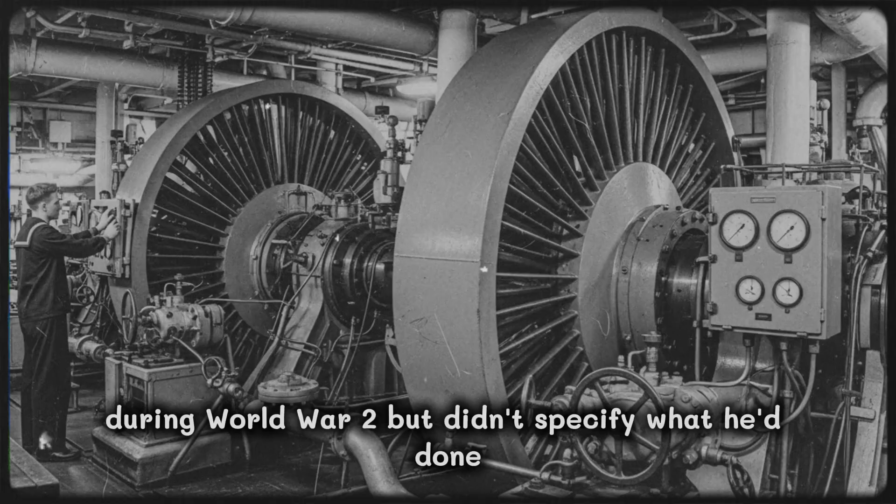Chen died in 1998 at age 76, and his obituary in the San Francisco Chronicle mentioned that he'd served in the Navy during World War II, but didn't specify what he'd done. His son James inherited the electronics shop and ran it for another 15 years before finally closing in 2013, unable to compete with big box stores and online retailers.

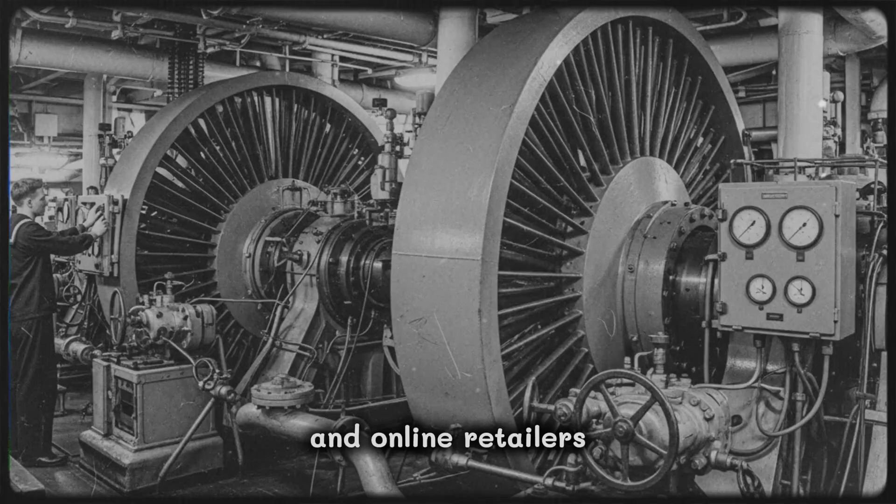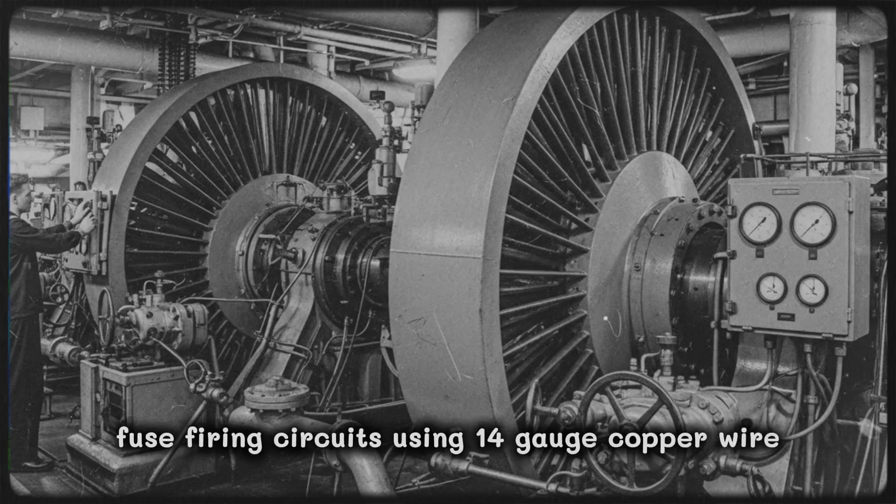But somewhere in the archives of the United States Navy, there's still a technical report dated June 22, 1945, describing a simple modification to VT fuse firing circuits using 14-gauge copper wire to bypass voltage regulation and eliminate a 0.4 second activation delay. The report is 47 pages long, includes detailed circuit diagrams and combat performance statistics, and concludes with a recommendation that the modification be adopted fleet-wide.

The author is listed as Commander J. Patterson, Fleet Technical Operations Group, but a footnote on page 3 acknowledges critical field observations and practical circuit analysis by Electrician's Mate 2nd Class Robert Chen, USS Laffey. The footnote doesn't mention that Chen was 23 years old when he made those observations, or that he'd learned electronics by fixing radios in his father's shop, or that his modification would save an estimated 375 American lives over the next 83 days. It just notes his name and rank, which is enough.

Engineering history remembers the solutions more than the people who create them. But occasionally, if you look carefully enough at the footnotes and the declassified reports and the technical bulletins that nobody reads anymore, you can find the names of the people who saw problems that everyone else missed and fixed them with whatever tools they had available. Sometimes those tools are sophisticated and expensive. Sometimes they're 35 cents worth of copper wire. The important thing is recognizing when the simple solution is the right solution, even when everyone with an engineering degree says it shouldn't work.